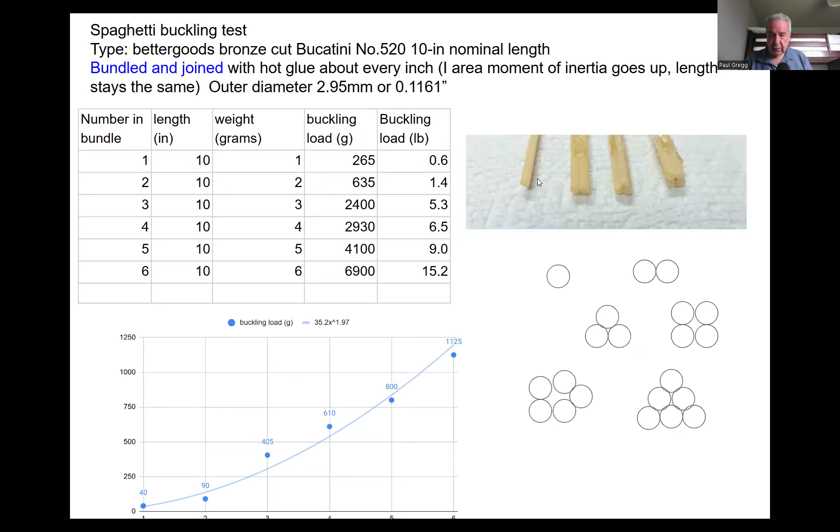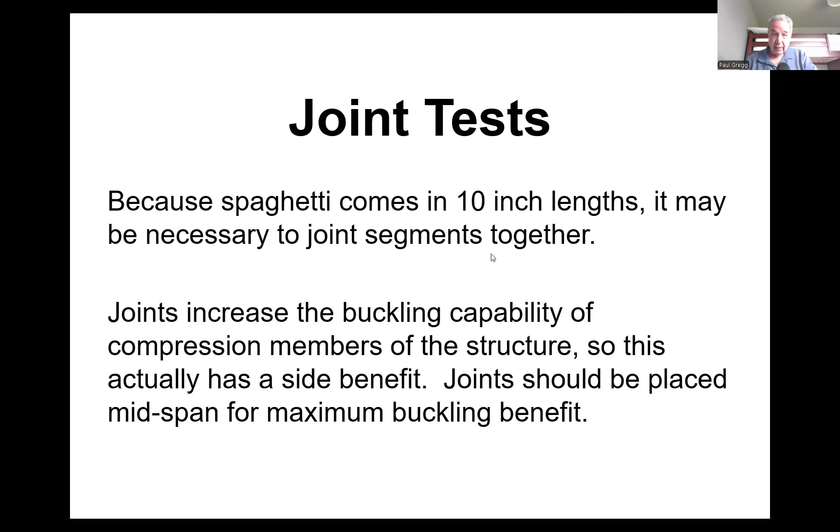And so, let's see. Joint tests. We've covered so far a bunch of buckling tests, and buckling seems to be the most critical thing in a spaghetti tower, and so that's where I've concentrated. The spaghetti tower is required to be 12 inches high at the platform for the weights and at least 16 inches high total, but the length of spaghettis are only 10 inches. And so at some point you're going to have to splice spaghetti pieces together. And we'll see how to do that.

I came up with four simple methods. You just do a single lap joint that's bonded on only one side with hot glue, or this type two, I call it, single lap joint that's bonded on both sides. Just spread glue along one side. And one variable in this whole thing is how far you lap these things. And obviously, the more you lap it, the better it is, but the heavier it is. And maybe you don't need to lap it too much.

And if this was a real building or an airplane, we'd be really trying to get the details out here and get the last tiny bit of weight out of it. But this doesn't matter too much. A longer lap is not that big a deal in spaghetti towers. But in real engineering, you want to use as little material and cost as possible.

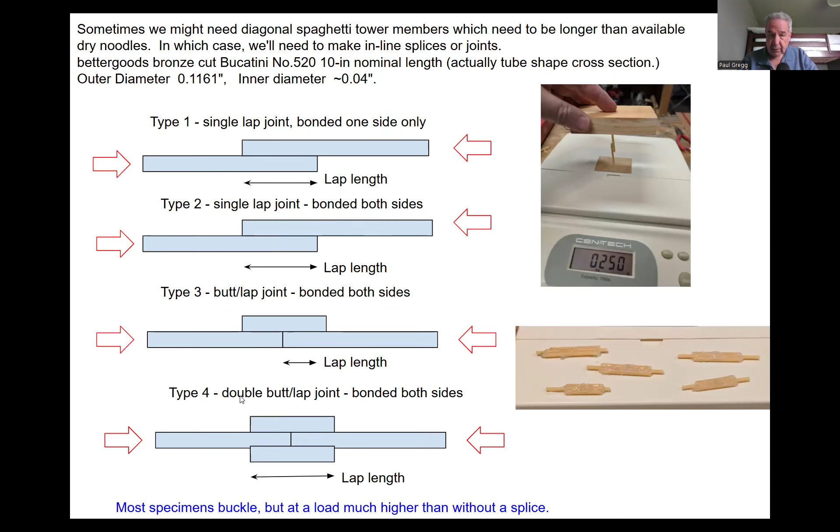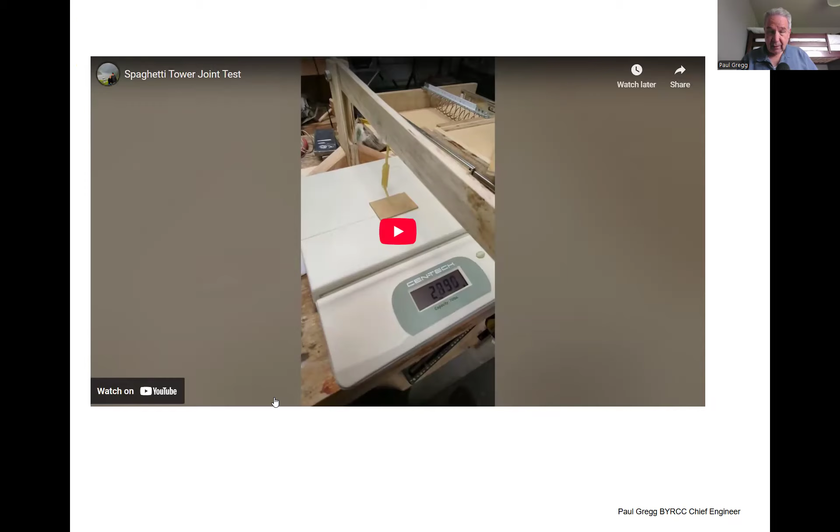Type three, the butt lap joint. You cut off a little piece of spaghetti and lay it on the side and then bond the whole thing on both sides. Type four is a double butt lap joint where you have two pieces of spaghetti. And I made these. Oh, this is the test. Just push on it until it breaks. Take note of the load. And as long as that load is well above the buckling load of the stuff anyway... I made a bunch of these little lap joints, just how it showed on the diagram.

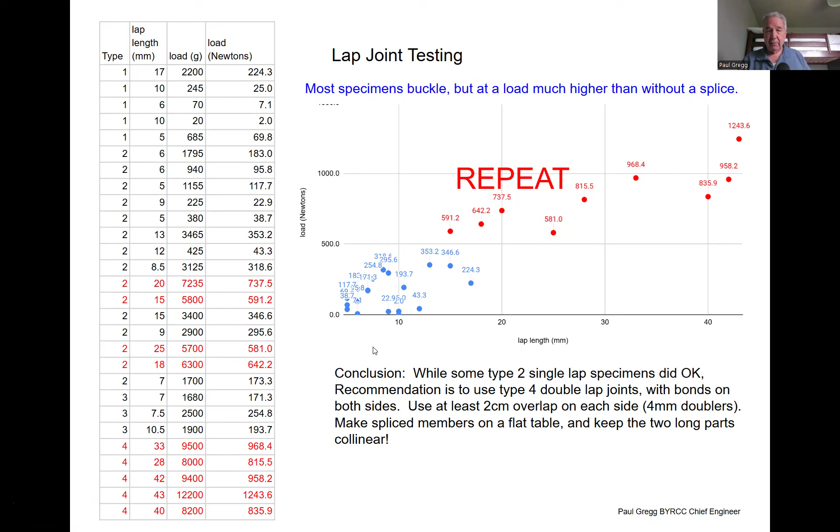And so if you just make the lap length above 25 millimeters, above an inch, about a half inch on either side, then it seems to be a really good joint. And that would be a general rule going forward. Just do a double lap joint wherever you want longer than a 10-inch piece.

And then we move on to three-point bend testing. This is one way of comparing materials and getting some data out of it, although it's a little cloudy because it's not pure bending, it's not pure tension, it's not pure compression, it's not pure shear. It's a test that has a mix of things in it, and we'll look at that.

This is the little wooden test fixture I designed. This is the postal scale that goes up to 70 pounds. And then you just put a piece of spaghetti in there. You can vary the total length of the piece when it's being bent, and you just put it in the center of that and push down and record how much load it takes to break that piece of spaghetti. Of course, the longer the length of the spaghetti, which is the purple piece here, the less force it takes to push that down.

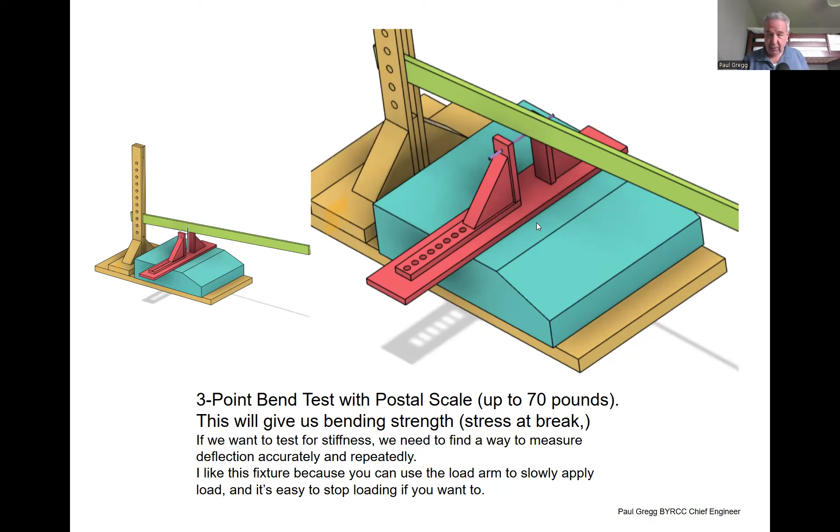I'll go through a little bit about what's going on here. This is really an introduction to the shear and moment diagrams of a beam. When we analyze beams, this is a 3-point test beam and this is a 4-point test beam. The 3-point test beam is used if you really make it short, then the shear dominates it and you can get a pretty good shear number.

And if you use a 4-point bend test, the nice thing is between the two load points, the moment is constant. This is the shear diagram, this is the moment diagram down here. The moment's constant across there. And so sometimes we use that. I only did the 3-point bend test, and it's really just to compare the kinds of spaghetti. It's not as good at data as tension and compression as far as engineering goes, but it can be used for acceptance.

If you're really interested, this is what we do for aluminum and steel and composites. When you get a batch of material from a supplier, you test some of it at some frequency so that you know that the batch out of the factory is good.

If I was interested in the strength of dry spaghetti, from every box of spaghetti I'd pull one out and do the bend test, and I'd have some criteria that says okay, this is strong enough spaghetti. They didn't make it thinner diameter at the factory or whatever. We don't really care much about that, but that'd be the equivalent of what you do when you want to accept material from a supplier: test it to make sure their process specifications are making it consistent.

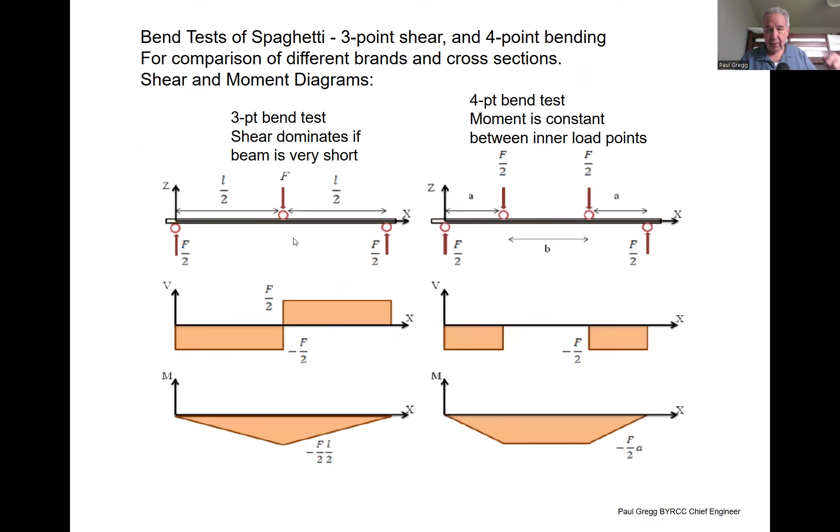When you do bending, when you push in the middle and you hold it on the sides, it goes into bending. It makes a smile if you're pushing down. The top layers of that material are in compression. The bottom layers are in tension. Okay. And if you want to know the stress from a bend test, there's a pretty simple formula.

The stress is equal to the moment, which is the length times the force on one side, times the y, which is d over 2, halfway in there, and then divided by the moment of inertia. And we've talked about moment of inertia, area moment of inertia.

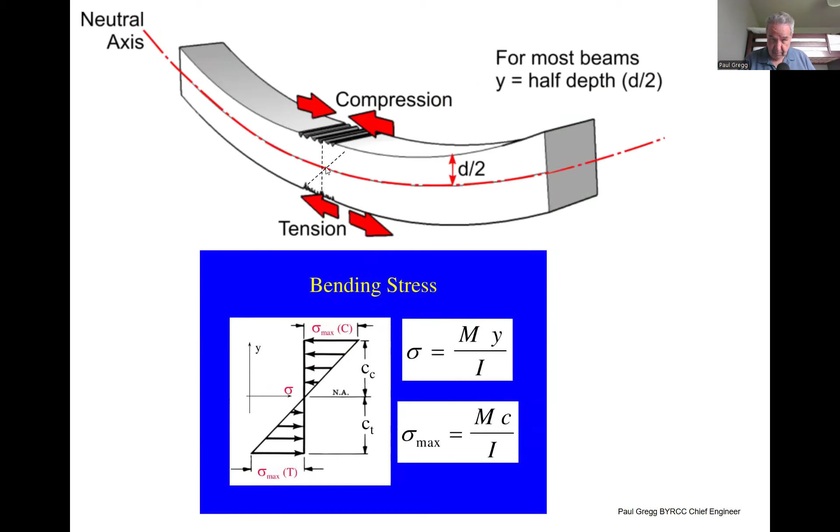I put different lengths of spaghetti in there, 4 inches, 3 inches, 2 inches. This is for the thicker tubular spaghetti. And then I loaded it up to some number of grams, and when it broke, I wrote that down and converted that to pounds. And then I did the formula, moment times this distance to the neutral axis divided by the moment of inertia, which was easy, I already knew those things.

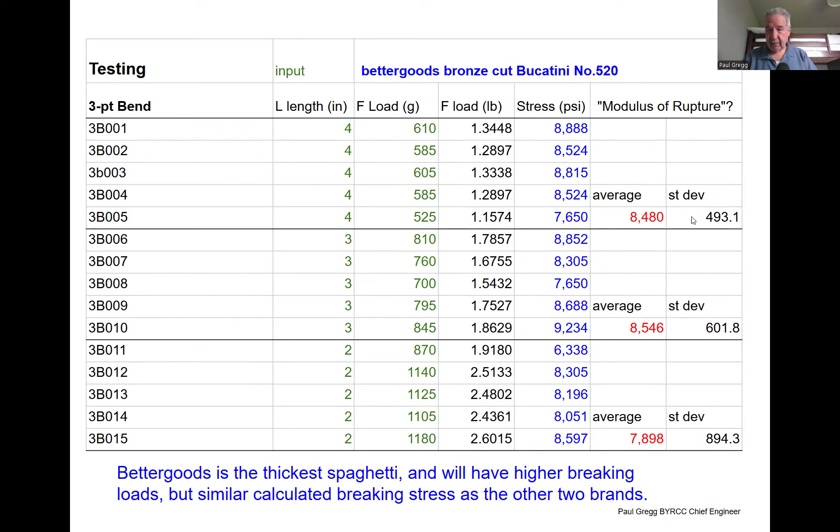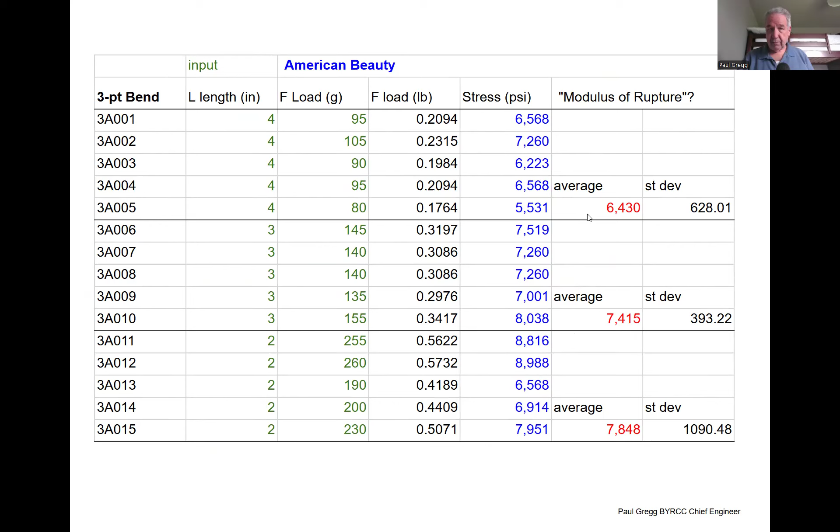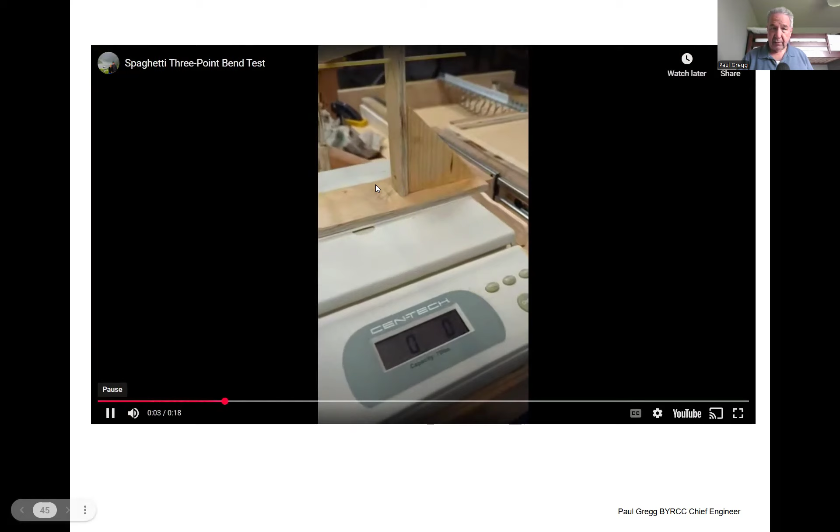So this is the test. It's a little hard to see. I'm pushing down on that big stick on the top and the spaghetti, and then I'm looking at the scale. So I start pushing down. I look and see where it peaks out. Right when it snaps, I'm at a certain load, and I write that load down. So this is like a 4-inch span, and I broke the spaghetti in there.

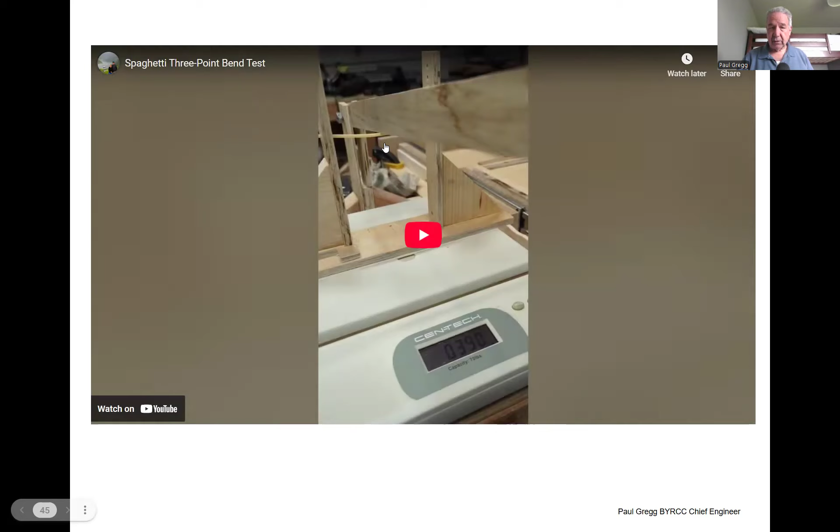So that was the testing, and I got pretty good correlation to what would be the tension strength of spaghetti with the 3-point bend test. So now this is all of those results combined: the Bettergoods, the American Beauty, and the Barilla. What I'm doing here is trying to back out the modulus. Okay, this is a little tricky.

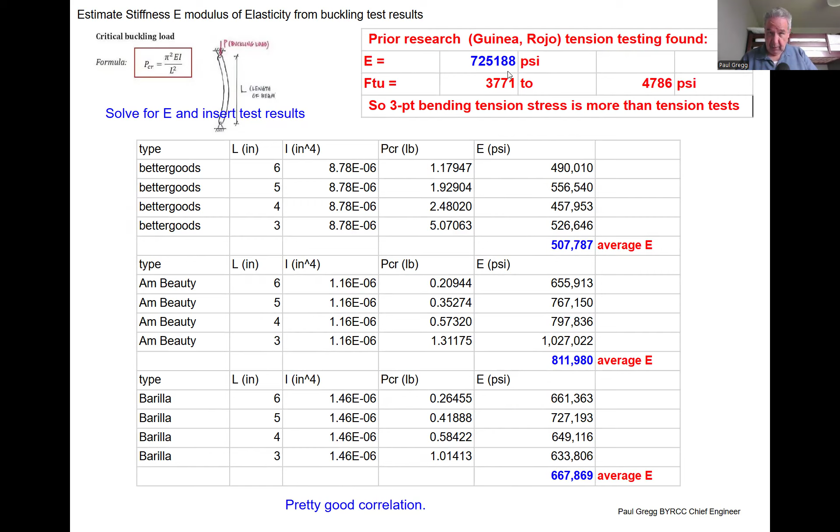I know this equation, and if I knew the length, the moment of inertia, and the load it broke at, I should be able to turn that equation around, solve for E, and back out the modulus of elasticity, and that's what I did. With the Bettergoods, I backed out 500,000 psi. With the American Beauty, 800,000, and the Barilla, 667,000. That's not dissimilar to what was published in this Guinea, Rojo testing, where they tested dry spaghetti. So my stiffness is about the same.

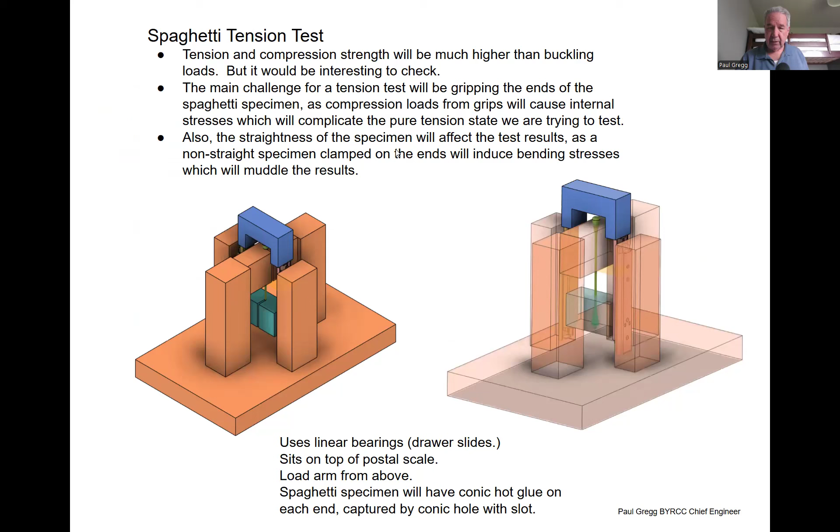Okay, I think I'm about done. I was going to use a different system for testing tension that was more complicated. I didn't do that. This is what I showed earlier.

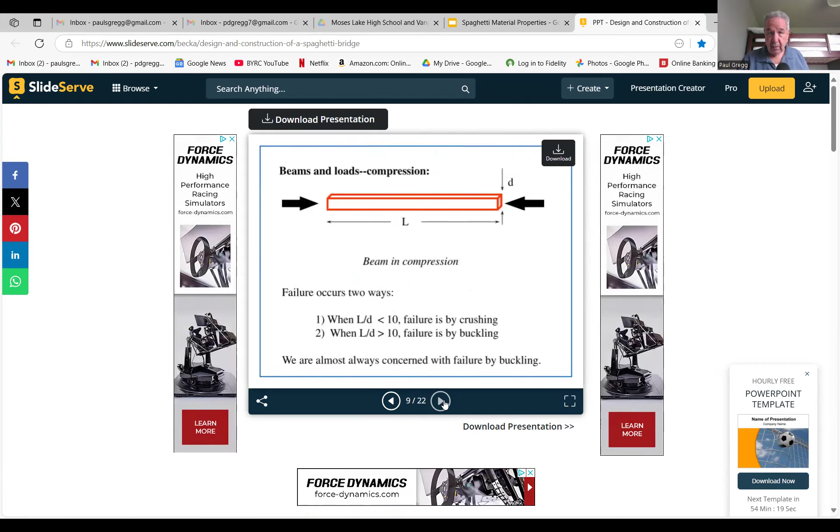And the only other thing I'll say: this is a PowerPoint, I'm not sure who it's from, on the design and construction of a spaghetti bridge, which is different than our spaghetti towers, but there's a lot of great information in it. It's from Johns Hopkins University, and they go through a really nice presentation of making bridges, and that can be another contest you want to do. They talk about trusses and things like that.